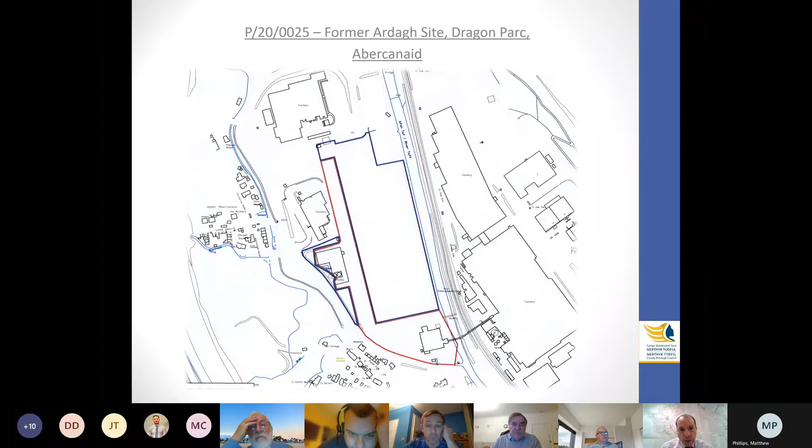So that's the site in front of you. The application site is outlined in red, and the wider Dragon Parc site is outlined in blue. If you go on to the next slide, Dave, that's the aerial view. As you can see, the majority of the wider site has been demolished. Many of the buildings on there have been demolished. But in the bottom corner of the site, you can see a remaining building and also a walkway across to the Hoover site. Thanks, Dave.

I see Gareth has got his hand up. Oh, he's put it back down again now, is he?

Oh, sorry, Hugh, if you carry on. Yeah, sorry. Thanks, Jay. Yeah, sorry.

So the bottom of the site is accessed off a mini roundabout that serves Abercanaid. On the bottom picture there, you can see the building and part of the walkway that is to be demolished as part of this proposal. Thanks, Dave.

So this is a plan, sorry it's a little bit small but they are large plans. As you can see on the western side of the site, there's the swale leading from north to south. At the bottom of the site, it enters via two fairly large culverts into the River Taff. The ditch itself and the raising of the level of land are not significant in terms of depth, but they needed to take water away from the site into the River Taff. Thanks, Dave.

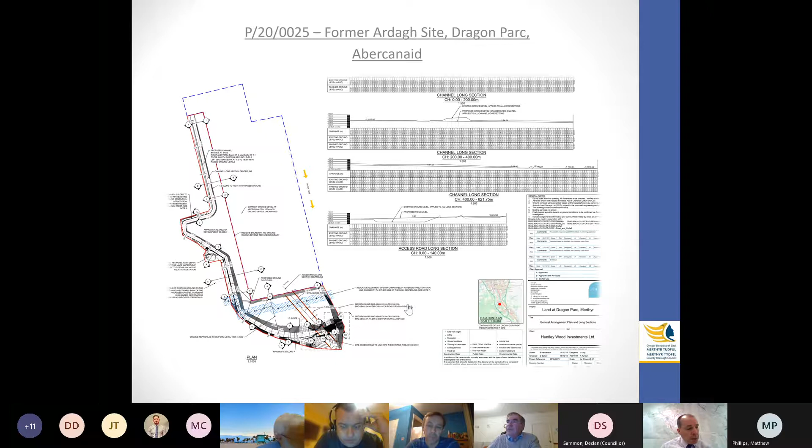Right, okay, thank you. So as a result of the consultation exercise and the publicity exercise undertaken, there's been no objections received. Suffice to say, the development of this proposal is essential to aid the regeneration of the brownfield derelict site. It will enable a sustainable method of flood management which would have positive impacts. Therefore, the application is recommended for permission, subject to the conditions highlighted on pages 11 to 16 of the report. Thank you, Chair.

Are there any questions? Clive Jones.

Thank you, Chair. My first question is on page 6 of the report, under the heading Proposed Development, third paragraph down, which reads: the proposal also includes other engineering works which mainly involve minimal raising of the level of the land. Could one of the officers tell me how much the word minimal means? What height is that land going to be raised? Because I understand the whole of the site is on a floodplain.

Yeah, thank you Chair. Through you if possible: the raising of the level of the land is minimal, no more than a metre in places, so it's more of a regrading rather than a major raising of the level of land. It only has to come out of the floodplain a little bit to take it outside the C2 floodplain area, and that, combined with the swale, will hopefully take it out of the C2 flood zone area.

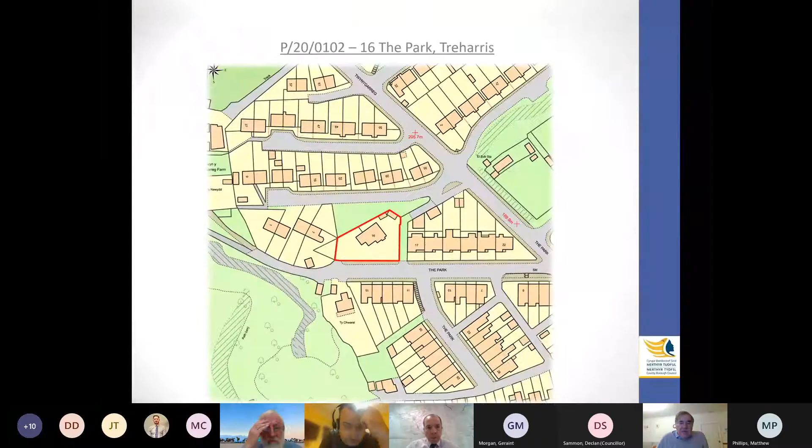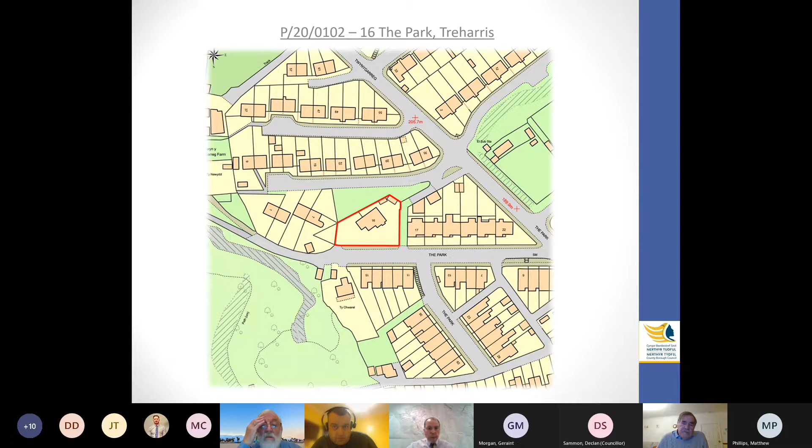Dave, can we have the slides please? That's the application site at the top of the park. As you can see, it's a detached dwelling. The road fronts the site, and then you can see a little access road going to the west, which leads eventually to Treharris Park.

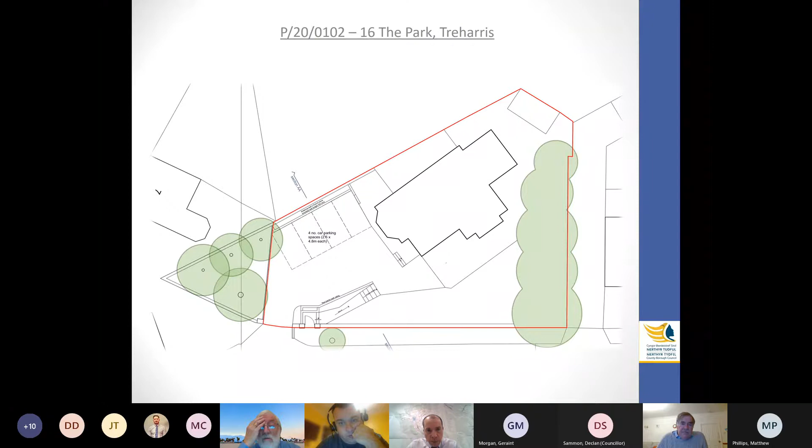Thanks, Dave. There's the site in a little more detail. You can see the access down in the southwestern corner. 4 car parking spaces are proposed, as shown on the plan, with turning facilities within the site to enable cars to get out and leave in a forward gear. There was a row of trees at the front of the site which have recently been felled, but we'll probably see them on the photographs.

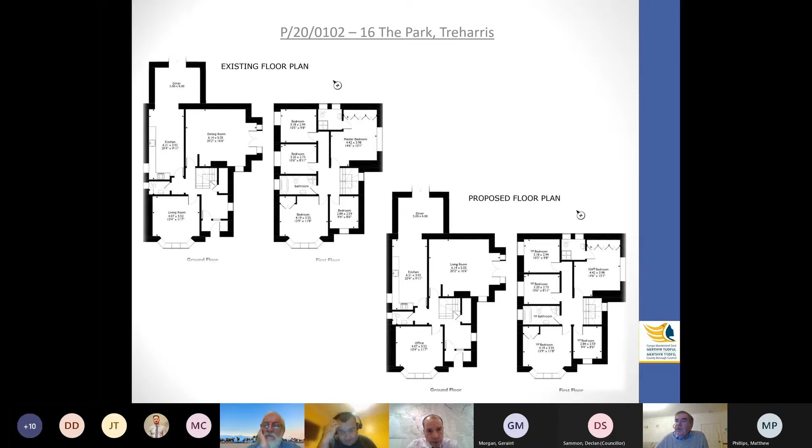Thanks, Dave. So there's the existing layouts and the proposed layouts internally, floor plans. On the left-hand side you'll see the existing floor plans, on the right-hand side the proposed floor plans. You'll see there's hardly any difference in terms of the internal arrangements, but in terms of the bedrooms upstairs, there is a staff bedroom being proposed, which was once the master bedroom. Other than that, very little alteration internally, and if you look at it, it almost looks like a house both ways, really.

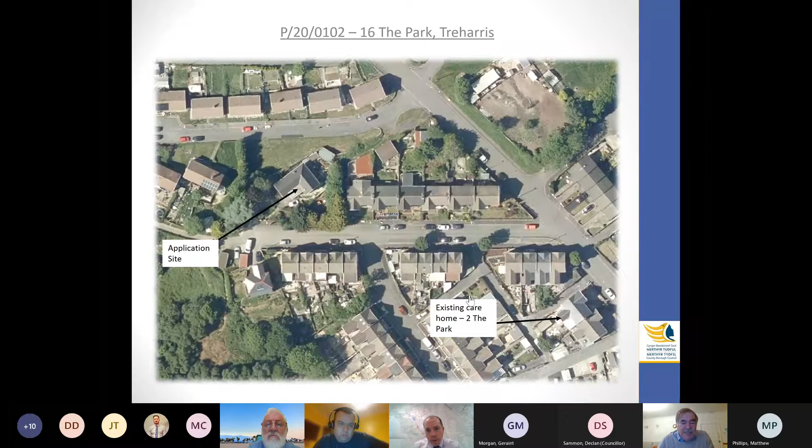Thanks. Are there any questions? Clive, can I just go through the - sorry. Oh Jay, yes, I just got off going through the application.

As a result of the consultation and the exercise undertaken, there were no objections raised by the engineering and traffic group leader or the environmental health manager. However, South Wales Police has raised an objection to the proposal. The main planning concerns raised by the police relate to the close proximity of an existing care home, which we've just shown on the slides, and the risk of increased levels of antisocial behaviour in the street.

As a result of the publicity exercise undertaken, 20 letters of objection were received, some from the same household. A letter has also been received from Councillor Gareth Richards outlining the concerns of local residents, and from Dawn Bowden MS. The objections received are summarised on pages 22 and 23 of the report and mainly concentrate on antisocial behaviour and crime. Objectors suggest that the proposal, given its close proximity to an existing care home at 2 The Park, would exacerbate existing problems in the area.

Highway safety concerns in particular include greater flow of traffic in the street, insufficient off-road parking, and greater demand for on-street parking, as well as impact on the amenities of surrounding residents. The main planning related concerns are overlooking and general noise and disturbance due to increased activities in the street. The application is located within the settlement boundary as identified by the local development plan, therefore the principle of the change of use is acceptable.

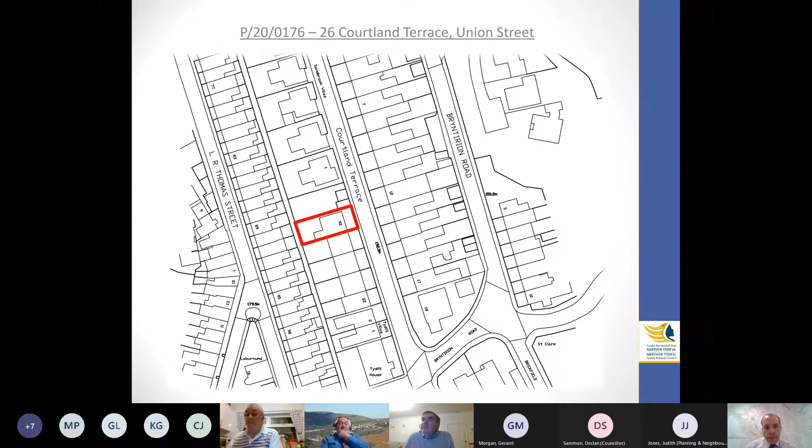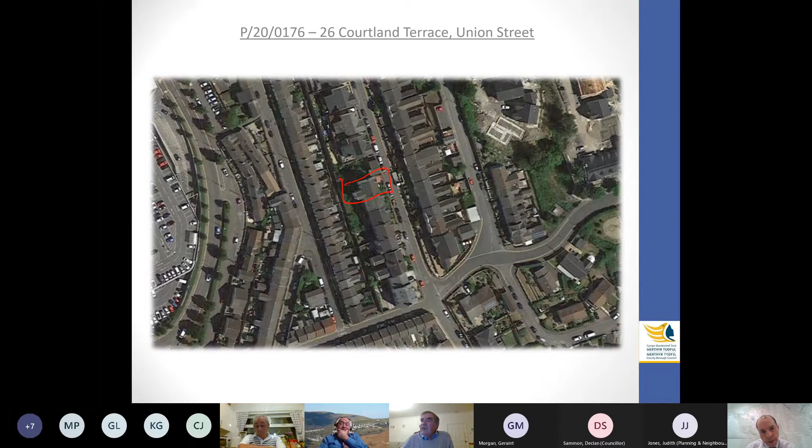I'm hoping we'll get the video working on this one as well. Yeah, okay, so there's the application. Everyone see that? Yeah, there's the application site outlined in red. And there's an aerial view of it. Can you show where it is on the video cursor or not? Yeah, so that's it. So Dave's cursor is on the, yeah, there we go, that's the application site there. As you can see, it's an area of terraced and detached properties, quite substantial properties in the area. A one-way street going from north to south.

So, fairly small plans. These are the existing elevations. You can see there is a flat already, a 2-bedroom flat at the lower ground level, which exists, and then a 4-bedroom property on ground floor, first floor, and within the roof space there's an extra bedroom.

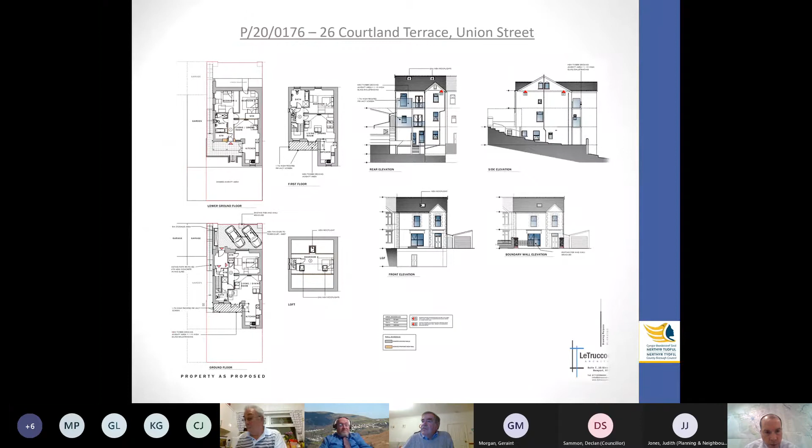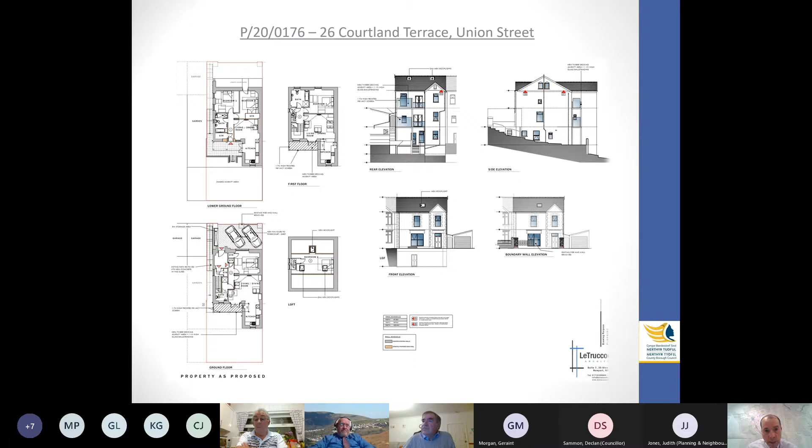You probably can't read it, but on the annotations the large glazed areas to the balconies are to be 1.7 metre high obscure glazed windows to prevent any overlooking to neighbours. But as you can see from the elevation, there isn't any overlooking to the neighbours on the right hand side, because their view is obscured by the 2-storey extension, and the plot to the left hand side of the rear elevation is actually a vacant plot. There's no house there at the moment.

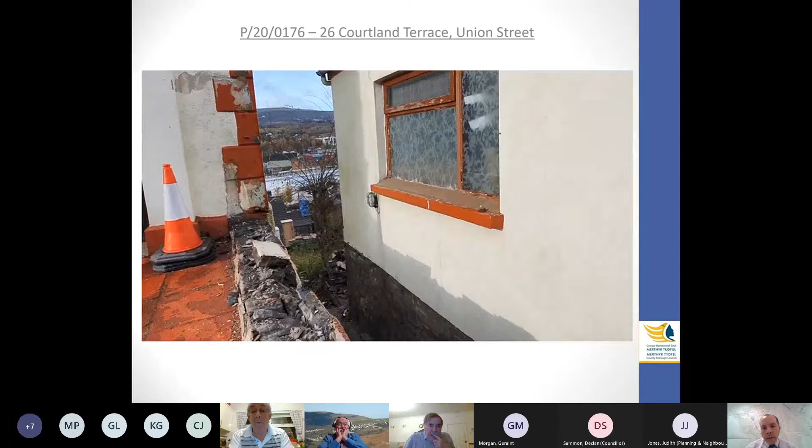So those are the properties on the left, and then the application site, as you come back, is right in front of you on your right hand side. And that's the area for the car parking to the front, and down the side access there is where you enter the existing two-bedroomed flat at lower ground floor level. That's the view back up the street.

That's it. Yeah, the property's in a conservation area. So is there any more slides?

No, that's it. Okay, so as a result of the consultation exercise undertaken, no objections have been received. As a result of the publicity exercise, 4 letters of objection have been received, which are summarised on pages 33 and 34 of the report.

The main planning issues raised are: too many properties have been converted into flats in the area, which has an impact on the character of the conservation area; antisocial behaviour from such facilities; parking problems in the streets; and overlooking from the rear balconies. That's a brief summary of the objections.

The application is located within the settlement boundary as identified in the local development plan. Therefore, the principle of the change of use to 2 flats is acceptable. The external alterations, mainly to the rear of the property, are acceptable and will preserve the character and appearance of the conservation area. Subject to the recommended condition 4, the balconies would also not result in significant overlooking.

This condition secures the obscurity of the side and the front of the balconies. The proposal should not result in a development which causes significant noise or disturbance to neighbouring residents above that which would occur from the existing use of the property. Only 1 additional residential unit is proposed, and the number of bedrooms serving the flats would be 3, 1 less than the 4-bedroom property they would replace. Antisocial behaviour is a matter for the police and/or environmental health.